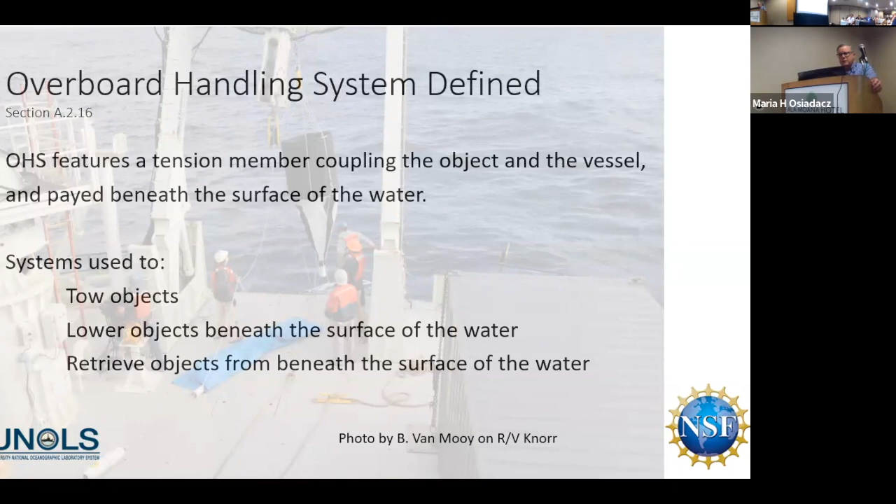systems, which I've abbreviated OHS, which are used on the academic research fleet. So the introduction of those words, overboard handling systems. The overboard handling systems features a tension member coupling the object and the vessel and paid beneath the water - systems used to tow objects, lower objects beneath the surface of the water, and retrieve objects from beneath the surface of the water. So what tension members are included?

Well, right from the get-go, we've always been talking about those tension members that were purchased and distributed by the wire pool. We're clear on that, that's straightforward. Tension members that were acquired maybe independently by the vessel, you might know those as having an OTH number - that's other, not provided by us, but the ship went out and bought it on their own, but they wanted it included in the database, and it's given an OTH.

The new thing, the new do, is the tension members brought on board by any science party or outside organization that are going to be used as part of the overboard handling system. That is the new stuff. So anything that comes on board that's a tension member, it can be used as part of an overboard handling

system - they are now included in Appendix A, which means that wire rope, cable brought on board, winch pools, tension members that are loaned from the wire pool, all of those tension members now have to take into consideration the provisions of Appendix A.

And what exactly does that mean? Well, we've got to think about the operating requirements, factors of safety, logs. How do you know how this cable or tension member was used in the past? All of the things that you now do for your own vessels have to be applied for anything that comes

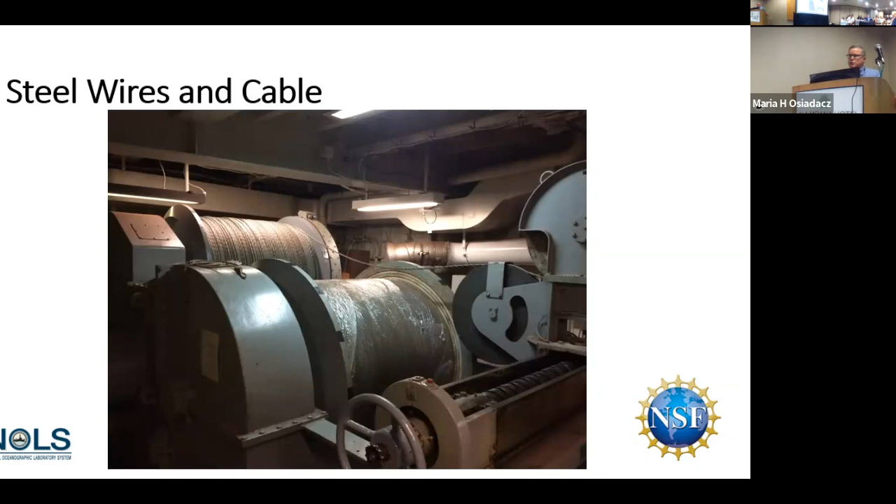same sheaves. And a problem that arises is that to use 9/16 wire with a factor of safety below 2.5, but equal to or above 1.5 - so on the hairy end of the 9/16 wire, where you're really pushing it to its limits - there were some very specific requirements, and that was a minimum sheave diameter of 26 inches and a groove that was between 0.576 and 0.618, so very close tolerance and very specific.

But in reality, the 9/16 wire was being overboarded using the same sheaves designed for the larger cable in many cases, which meant that the sheave diameter was greater than or equal to 27 inches, and the groove diameter was larger, between 0.698 and 0.748 - so it was a bigger groove, more slop between the groove and the wire than what the 9/16 wire called for if you were working down below 2.5.

So in that configuration, the 9/16 wire was limited to operating at a factor of safety greater than 2.5. Just couldn't get it down. People wanted to use it, and so in order to do so, it required a waiver.

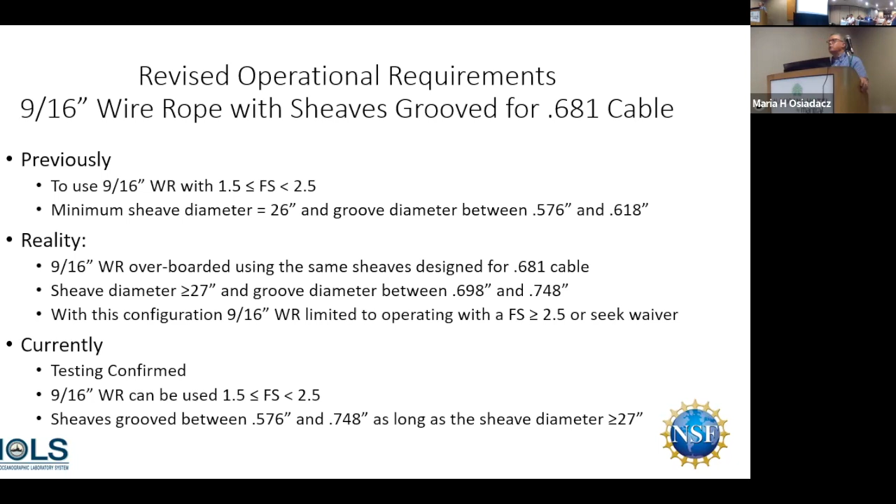So let's talk a little bit about testing steel tension members. The responsibilities for monitoring or determining the tested breaking load, TBL, of tension members.

The responsibility of the vessel operator is that you need to submit a break test request via the ship's wire database, the wire pool database. The ship operator's got to send the sample to the wire pool, hopefully labeled with the NSF identifier and with a copy of the break test request, because we get a lot of cables in. Barbara gets all these samples in, and we need to make sure we keep track of whose sample is what. You may send in one sample, but there's about 4 or 5 on the shelf we're trying to keep track of as well. So it's very important to label and send that break test request in with the sample.

Also a requirement of Appendix A is that you submit a corresponding tension member log, lubrication log. Now these things can be uploaded into the database without needing to send us a copy. That can happen all within the wire pool database, and each vessel has a data entry.

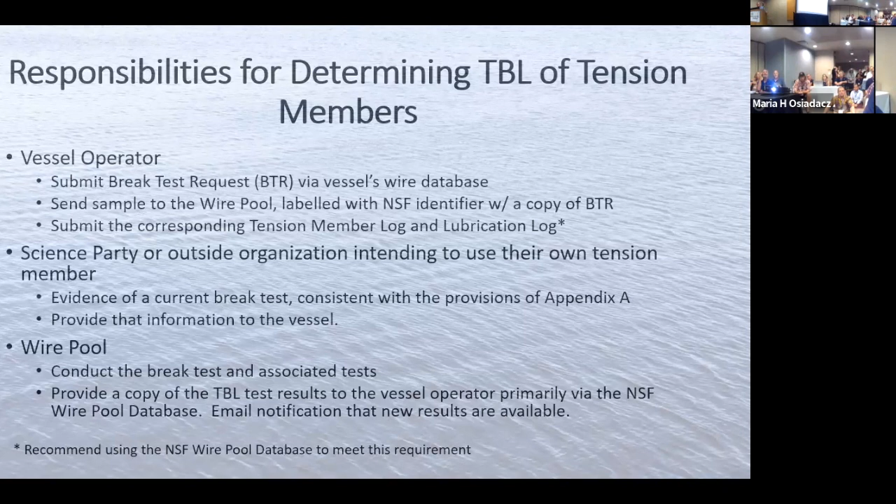But it will show you the difference between the different flavors of termination. I think I've put six different kinds of terminations on 322 over the years, and they do behave differently.

Barbara has a tremendous showing - just lost, it didn't make the flight because it was too big - but she does have handouts that show basically how the vessel-terminated one compares with the manufacturer's minimum breaking strength, as well as the results we've gotten with our terminations, which would be the cable strength.

So that's why we're pushing for getting both numbers, because we want you to know what you're dealing with and maybe correct a problem with your techniques.

I mean, we get samples in - on the 322 we use, what is it, that molten material? Yeah, and we go to great lengths to do the perfect termination. And we can, because we're in the lab, it's nice and warm.

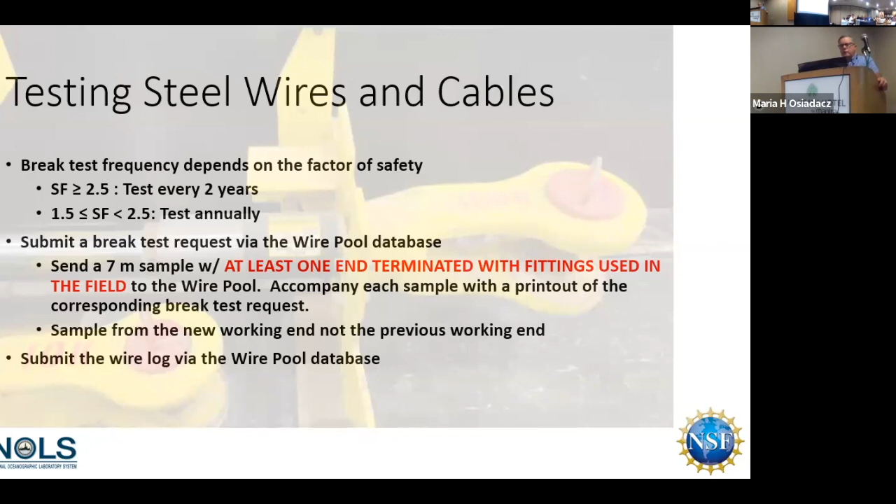And submit a wire log. Yeah, wire logs, oh man, there's another thing. Wire logs - so according to Appendix A, don't shoot the messenger.

Tension member identity, the winch manufacturer, the model number - for example, Hawboldt SPRE-2640. A record of all the spooling operations and cutbacks, including re-terminations. So when you cut back, it should be in the log. When you re-terminate, how much did you cut back? When you know how much you cut back, change the length of the cable.

This is the whole idea of the database. Now you can use the database for much of this. You cut back, you can adjust the wire length. That's the beauty of the database.

It's kind of a basis for your history, because what we're trying to track here is cradle to grave: new cable, everything it went through, before we finally decided to get rid of it. A description of the sheave train, number of sheaves between the winch and the water, all the sheaves, dimensions, including the diameter, the tread diameter, root diameter, and the dimensions of the groove.

And then for each deployment, the maximum tension during the cast, not some summary of how it performed, but for each deployment: max tension during the cast, wire out at the time of max tension, and the maximum wire out for each deployment. Wire out at the time of max tension, that's important so we can go back and look, and know how much wire was out.

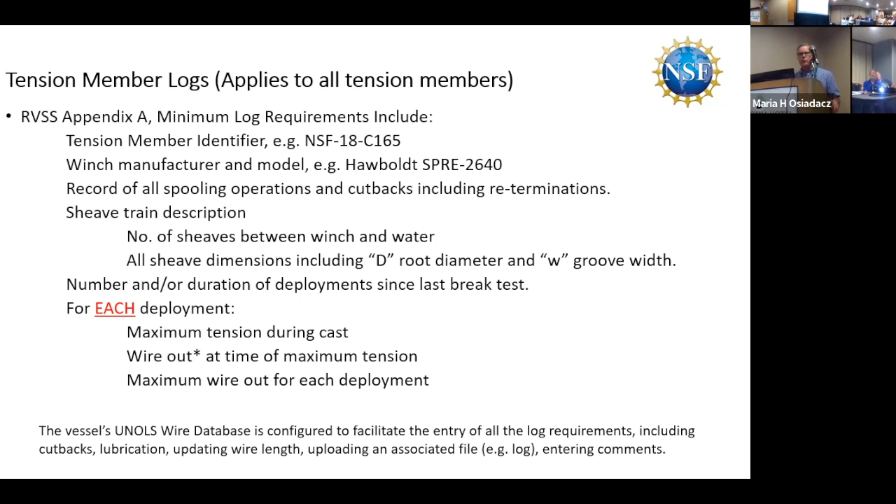All right, you clear on that? Very good. Is that a requirement for science-provided wires as well?

Mention every log. Yes, if it's in Appendix A, if it's mentioned in Appendix A, it goes for the science wires that came on board. And that's gonna be your problem, everybody in this room knows they have to submit a log. But science, they're not gonna have any guarantee, and that's why you need to get to them early in the cruise planning process.

So are you gonna tell them they can't use it, or are we gonna tell them it's gonna be a 5-to-1 factor of safety, or what do you mean, go to your...

But it gives you some teeth when this junk shows up and you're like, what is this? It doesn't say in Appendix A that you're gonna use a factor of safety of 5. Yeah, because even with a factor of safety of 5, you still have to test it. Yeah, there you go. And I'm trying to remember now, factor of safety greater than 5, wire log requirement. Right, yeah, there is, yeah, exactly, right.

So here, this is just to get the conversation going. Ted and I have been discussing this. We get all kinds of wire logs in, you wouldn't believe what we get in for wire logs. We really want to standardize the wire log, and so these are some of the elements. All of them are mentioned in Appendix A, I just went through them. This is a layout that we thought, or I thought, Ted's got his own version, and it's open for discussion. We'll work with you, we want to get something that's going to work for everybody, or most of you, and apply it. But it has all the elements: cruise number, the date...

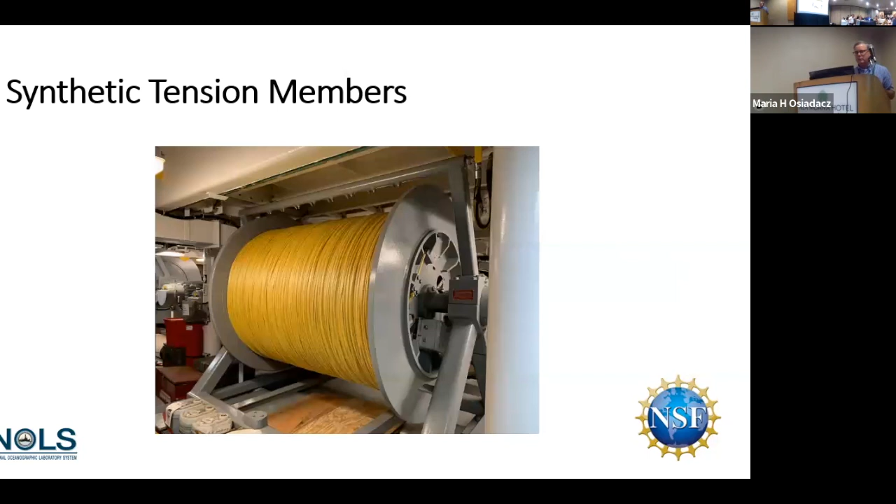And we're working on that, but we're not quite there. And this is where this whole thing about the wire needs your help, because you've got these things that are generating 20 hertz of data, and I don't want 20 hertz of data. I want, like I just showed, if I could go backwards I would - no, can I go backwards? There we go - you know, in a decent format, print it out so we can read it, not chicken scratch.

Extract what you're collecting. I don't know how to do this, but I know you do, because you guys do it all the time. That data stream, extract the pieces that the wire log needs, put them into a sheet like this, and then that becomes your wire log. That's what we need.

Okay, I'm gonna throw Bonnie under the bus. I've been talking to people, like, oh, Bonnie's got that, Bonnie can do that.

We came up with a web-based application that runs on the ship, combining local inventory management, maintenance and event logging. The winch operator logs events, and then you can export based on a date range into a CSV table.

I know I'm fearing people, but I don't want to... Okay, but it would be great if you could show people. Yeah, I'd have to learn a few things to make it work, but definitely, I know you can do it. And then we can share it.

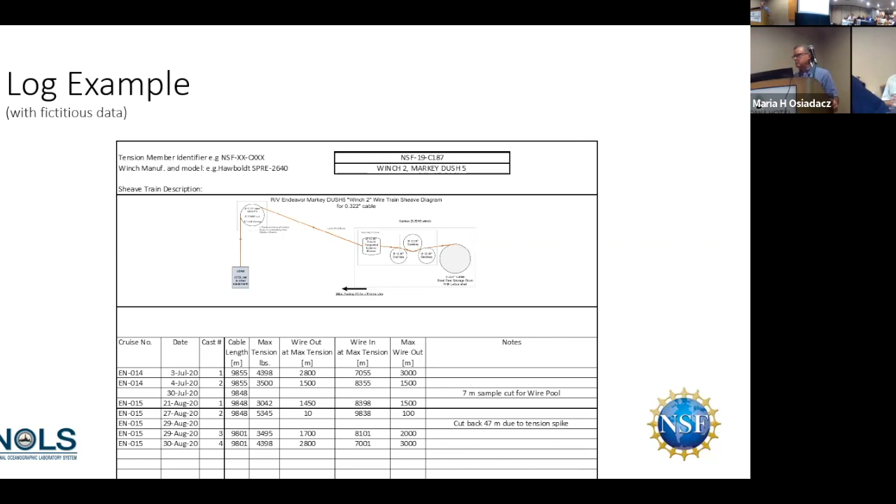That's your fallback, I know it's hard. But you guys broke that Vectran, right? So there's some Vectran running around the fleet that's 322. You can just spool your 322 off and I'll use that to put my pumps over the side. When it comes back, it's like, hey, is this the same Vectran you brought 6 years ago? Oh yeah, it's the same one.

When we talk to the guys at Scripps saying, hey, this is coming your way next, then talk to the manufacturer, it flies somewhere around the 2,800 meter mark. And it's like, crap. So before it went onto the bill, we're like, well, break this for us first, because we don't know what's going on with it. We had no history on it, it just shows up, we have no idea how it's being stored. And if it's jacketed, you don't know what's going on inside.

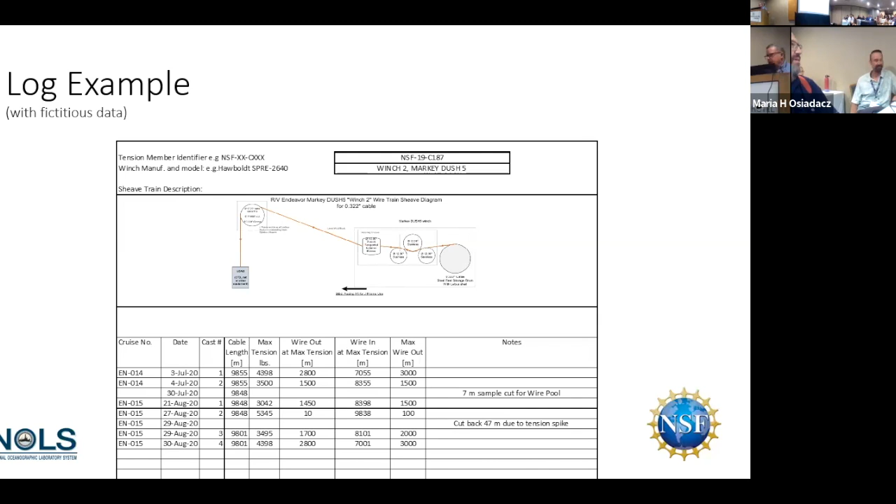All right, let's see, synthetics. So the starting point is factor of safety of 5 or greater. D over d equal to 40 is required per the provisions of Table A.8.5. So if you're overboarding a synthetic, right from get-go, it's going to be a factor of safety of 5. Now for many applications, that's just not going to be good enough.

One case in point is that Armstrong wanted to do coring in the Puerto Rico Trench, and they needed to get down to 8,000 meters. Wire rope by itself wasn't going to hack it, it would break before it got there. So they wanted to use synthetics, but this is 9/16 plasma, and they couldn't use it with a factor of safety of 5.

So what we did was we went to the manufacturer, got all the specifics - the overboard handling system, the sheaves, anticipated loads, number of operations - and were able, over a considerable amount of time, to get it to the point where if we allow a lower factor of safety, they're going to be able to do their work and the rope's going to last. But that takes time, and that's the point. It takes a lot of time to get that kind of information.

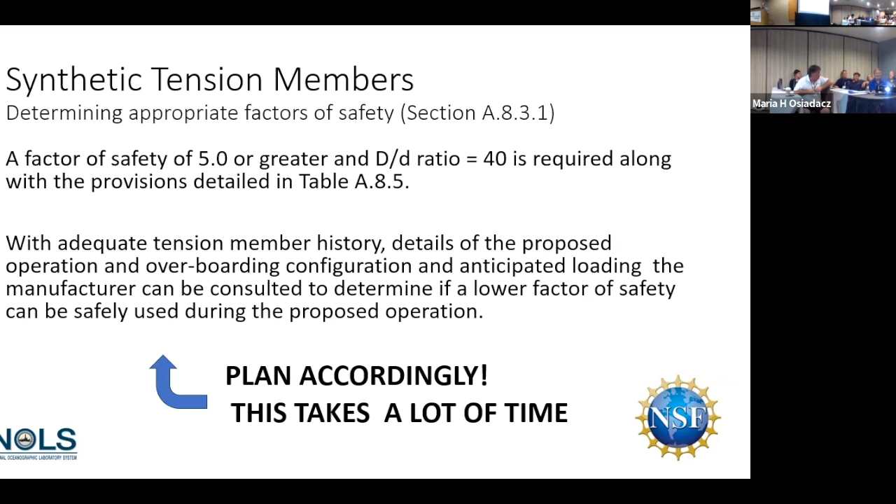Okay, so what do we need to be able to work below a factor of safety? A comprehensive log for all previous deployments. This is why we've got to get into the practice of having this logged information, because if we don't have it, if you skip something and forget to include a little entry, we might overload it for 700-800 cores or whatever. We've got to have a good log.

Tread diameter, groove diameter of sheaves, science requirements. We mentioned the dry and wet weights of the gear, the weight of the samples that are going to be collected, and any dynamic or static loads such as pullout. We need an estimate of those things. We're going to work with the manufacturer to try to determine if that particular rope, or the rope you have on board, is right for the operation.

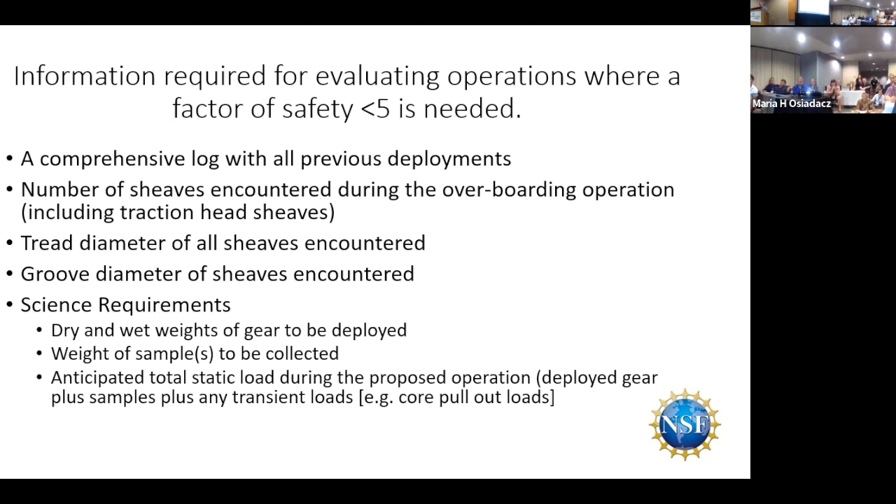Okay, so we have to test synthetic, or figure out how best to test it. Now this can be a bit confusing, so I'll try to make it clear - ask questions if I'm not. The samples are requested before and after, and this is different before and after each cruise when the synthetic is utilized. So we need a sample before and a sample after.

The sample before can basically be the working end, what you have, because you will have already tested the sample after the previous cruise. So at the conclusion of the cruise, a sample from the extreme working end - what you're used to sending for wire rope - is not representative of the rope's condition. We need a sample that's gone over all the sheaves while under load. The sample location and length will vary from ship to ship, but the hope is that it contributes to determining to what degree the use of the rope has affected it.

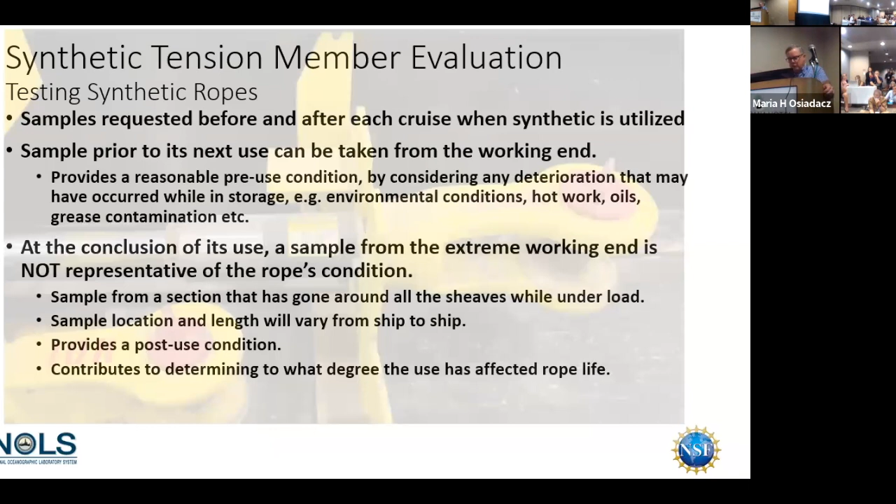So the sample before the cruise is at the working end, the end of the rope sitting there looking you in the face, but the sample post-cruise could be further in. No sample right near the load, because it's going around all these sheaves, going through traction heads, and then finally gets to the winch drum - that's right where it enters. The winch drum is where you want to take that sample. Yes, that can be 100, 200 feet of rope, but there's no sense testing the rope unless you're testing a piece that's gone around all those sheaves, because going around all those sheaves under load is what deteriorates the rope, and that's where we need the sample to see what the deterioration has been.

Yes, you're talking 20 meters, the way it's written, cutting off the end of a cable. If that's 681, we're doing it once a year. No, this is synthetic. You can burn through a lot of cable, yes, but it's not going to be this way forever - it'd be gone in a year.

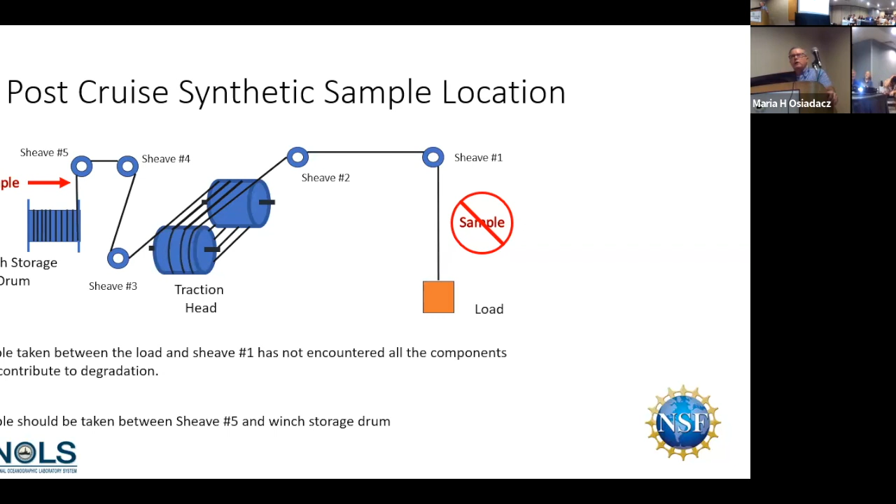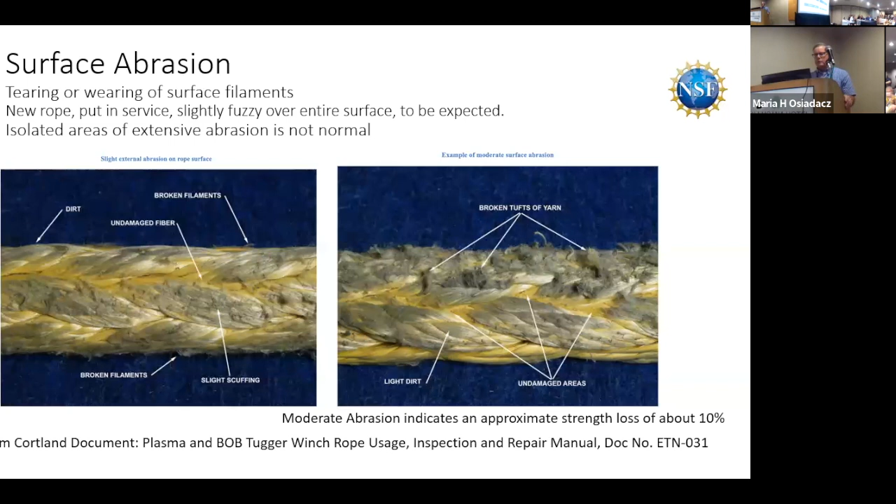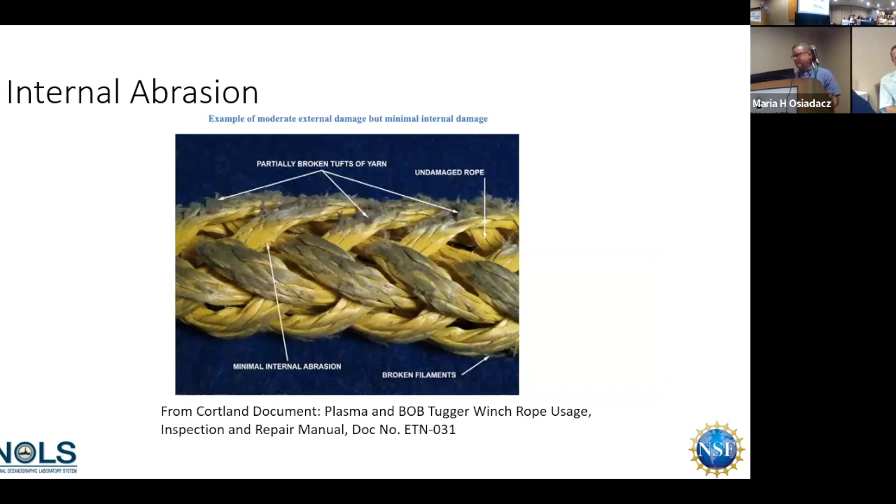And you can do this when the rope's coming back from a deployment. Internal abrasion, in this case, is pretty minor - you can see the surface abrasion, but because stuff can get inside the rope, there can be sandblast grit, rust, who knows what, and all that stuff as the rope is flexing is going to be deteriorating it. I don't think that's a problem, but we once thought that was.

Cuts - I was going to say, on the Armstrong and Thompson also, we always keep it up off the deck during transit, because if an edge of the block was coming into contact with it when it was loose, we'd make it so it wouldn't shake. Yeah, and Rick, I'm curious - maybe it's coming up - on the Thompson, when we use this on the Dynacon winch.

That melted. Yeah, I don't have a picture of it, but I'll mention it. Obviously cut strands are an issue that will weaken the rope. That's exactly what my forklift brake looked like.

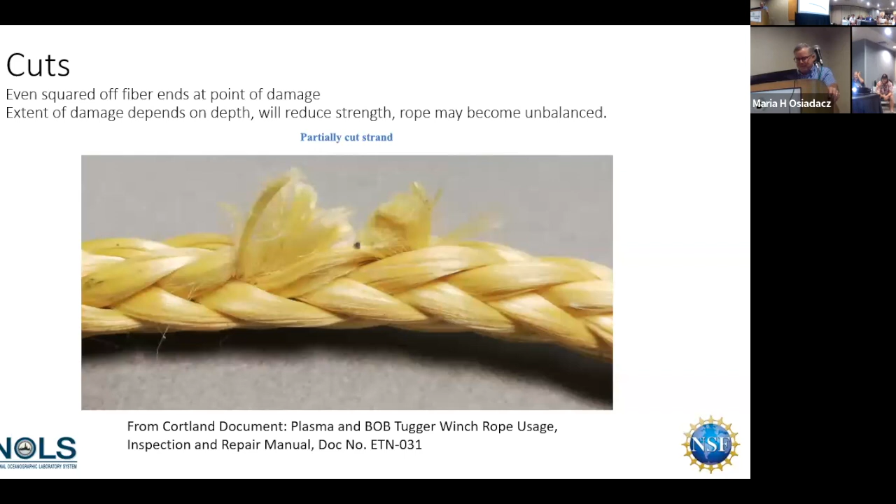It's time to get rid of that little piece right there. With pulled loops, usually you can work the pulled strand back in - if you milk it back over the rope, you can get it to sit better. But you don't want to keep using the rope like that, because it's not distributing the load amongst all the strands.

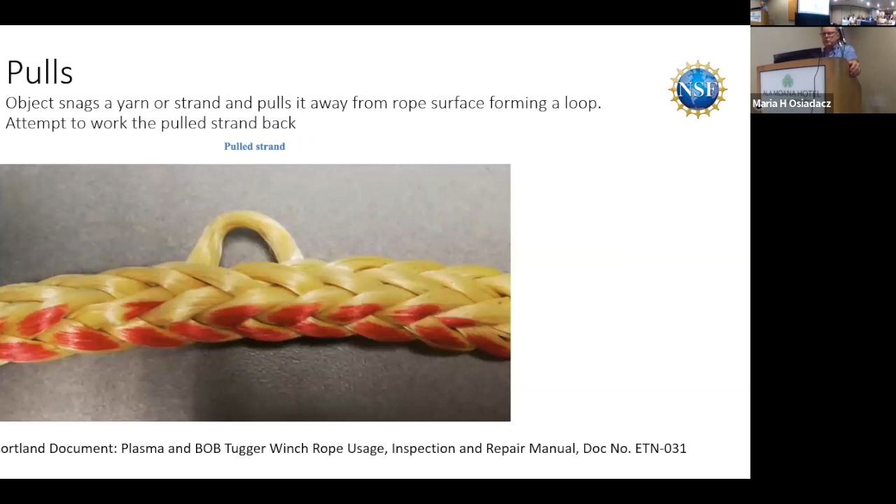Burns is what Chris was referring to - you might have heat burns. We had a case with the Dynacon winch where it was slipping, and rather than stop and take advantage of the static coefficient of friction, the winch kept running with a lower dynamic coefficient of friction, and we ended up heating up the rope.

It's called plasma hyco, for high coefficient - it has a high coefficient of friction coating on it, and that was actually coming off, like a snake skin. It's bad, or it should be - I have a jar of it.

We dropped a 6,000 pound load doing that once, because they were slipping it on a capstan head. The friction caused the line to melt, and when we stopped the capstan, the heat got sucked back into the capstan head and all the fish scales turned basically to glass. This thing just went spinning out - there was no way to stop it. Oh, wow - it happened to draw a hockle, and it locked after we dropped about 15 feet.

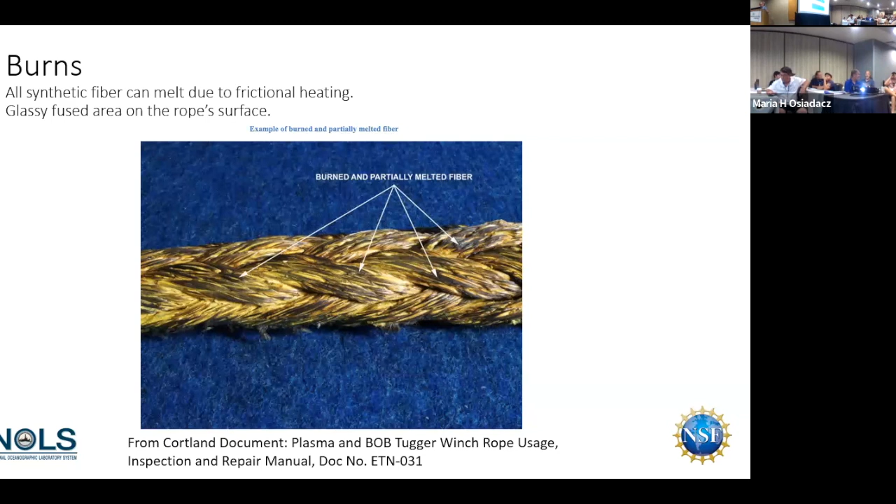Uneven diameters - I've seen it more on the bottom one than the top one. That one was, well, this is a double braid, so whatever's going on inside that second inner layer must have been compromised in some way.

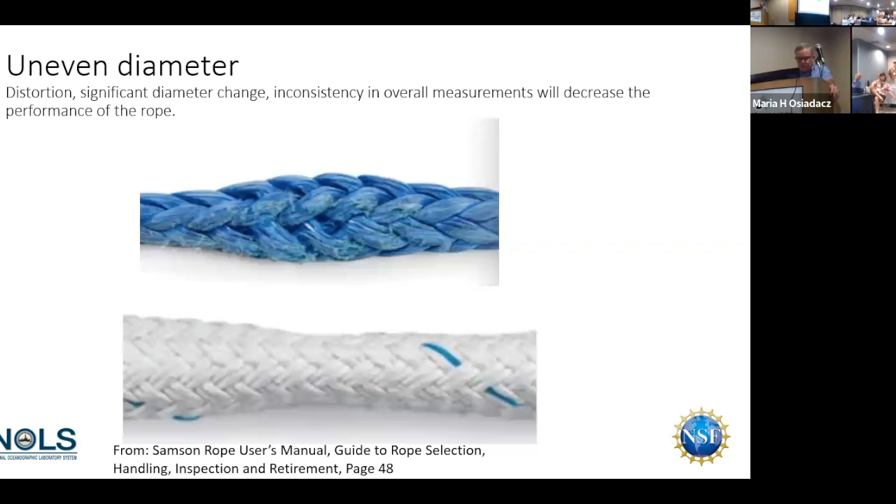These are all just things for your visual inspection. Contaminants - we mentioned abrasives that might get in, like sandblast grit if the tension member is on the ship and work is being done, or rust getting into the fibers. Exposure to chemicals, washes used on deck - you've got to be careful about splashes, and discoloration as a result of chemical exposure.

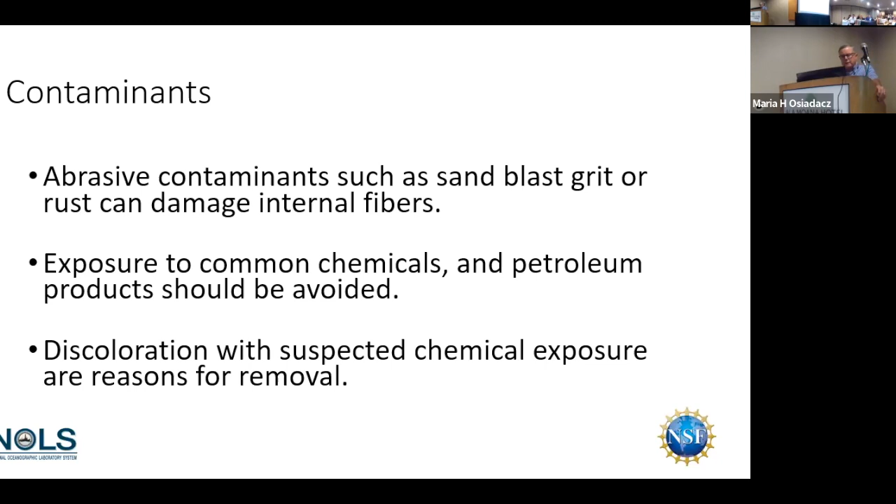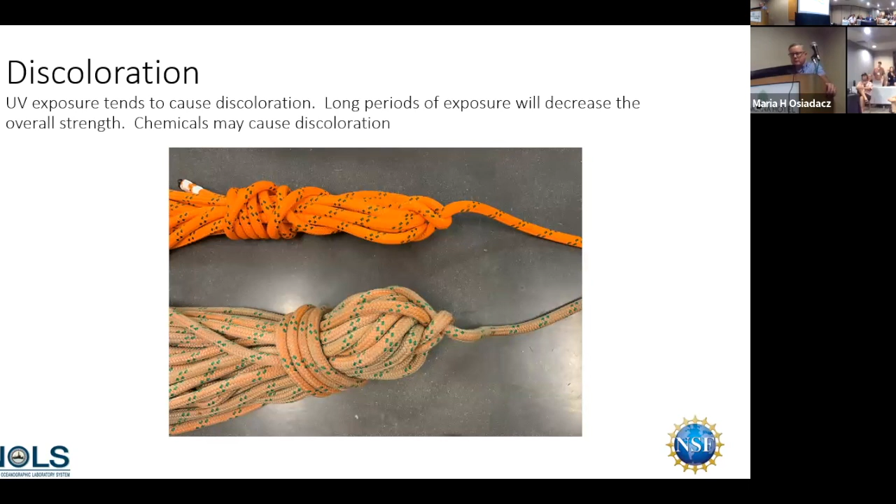Three things we talked about: look at the splice, make sure the tails are there and didn't get sucked in. Is the thimble cocked? We've seen stuff come back with thimbles at right angles to how they should be oriented. The condition of the thimble - I've mentioned thimbles that collapse because they're too thin, not heavy duty. Look at the splice particularly, because that's probably where you'll get a break due to stress concentration. I'm just saying avoid the standard duty ones.

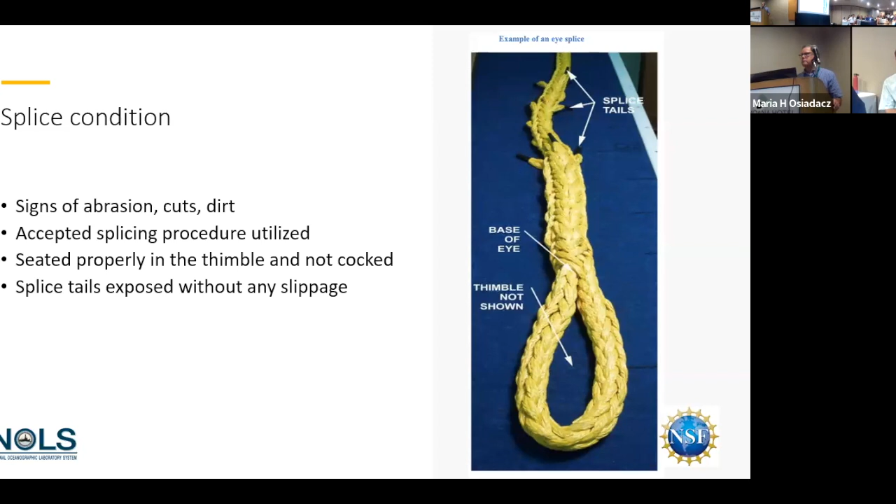I'm done. Okay. I think that's it. Any other questions? Oh, sorry, Ted. That's okay.

It should be on the web anyway. There's more conversation to be had, but maybe we continue this online, or do some more pointed conversation - you know what I mean, like a Zoom session or something. You said you have a workshop coming up, yeah?